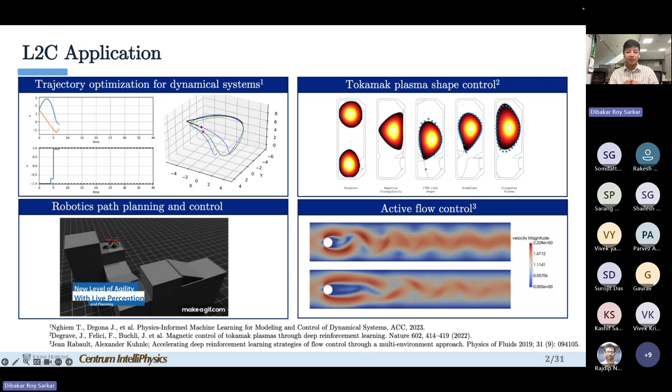These four examples, spanning from ODE to PDE, from RL to DPC to imitation learning, all share a common idea that I mentioned at the start: an offline-trained neural network replacing an online optimizer or a hand-tuned controller. Our paper sits squarely in this family. On the next slide, I will step back and give you a broader view of how the control field is organized today.

So we have seen what learning-based controllers can do. Let me zoom out and give you the honest picture of where the control field sits today, so we can see where our contribution lands. In general, we can categorize the optimal control problem into model-based or model-free methods, and model predictive control is a flagship method of model-based optimal control.

If you walk into any industrial facility, a chemical plant, a building HVAC system, a refinery, a vehicle control system, you will find something that Richard Murray at Caltech has pointed out in his optimal control textbook. About 95% of the control loops running right now are PID controllers or hand-tuned, expert-driven, rule-based logic. That is the reality of the field. The remaining 5%, the more sophisticated setting, is model predictive control.

MPC is the workhorse of modern advanced control. It's rigorous, it handles constraints. It has been deployed on everything from autonomous humanoids to chemical plants to autonomous drones to autonomous racing, as you can see in the image here. When control people specifically say state of the art, they usually mean MPC.

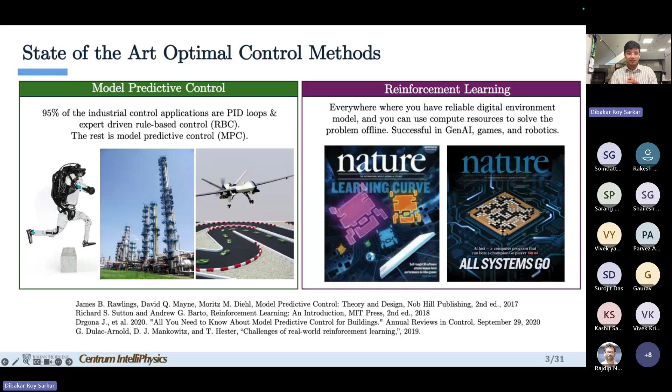Let's make the problem mathematically precise. So, what is an optimal control problem? Optimal control is, at its core, a very clean mathematical framework. It says, given a system we want to steer and a goal I want to achieve, find the control input that best matches the goal while preserving the laws of physics and any practical limits that we have. And that's the one-sentence definition of optimal control.

So let me walk you through the four pieces of the standard formulation, because every method in the rest of the talk, DPC, MPC, our framework, is just a variation of this template. So first we have some objective function we want to minimize, with two parts. It has some running cost integrated over the time horizon that penalizes what we care about at the time instances, like tracking error or control effort, and a terminal cost, phi of x at the final time, which penalizes how far the final state is from where we end up.

And the goal is to find the optimal control signal, u(t), that minimizes this total cost, subject to the state dynamics represented by this, with some initial condition. And that says that our control has to be consistent with the physics. Whatever you do with the control, the system should evolve through the physics, or through the system's actual dynamics.

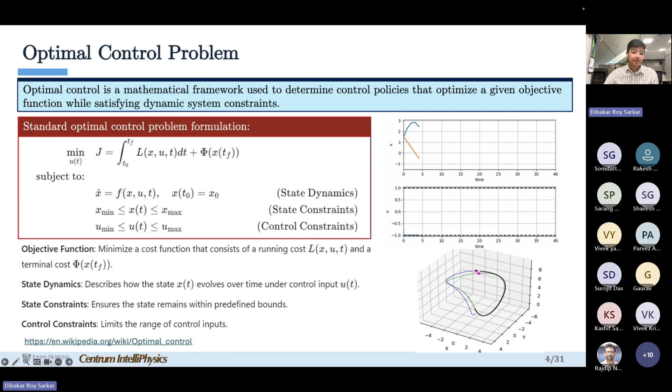And in the bottom is the same trajectory in 3D space, and the solver has found a path from the starting point to the target that's optimal in the sense of cost and feasible in the sense of constraints. And this is the formal problem.

So now, how do people actually solve this optimal control problem in practice? There are broadly three families of approaches, and every method in this talk is going to sit in one of these three columns. On the left are analytical methods. These are the classical tools from optimal control theory going back to the 1950s and 60s, like Pontryagin's maximum principle, which gives you necessary conditions for optimality and reduces the problem to a boundary value problem, and Bellman's principle of optimality, which is the foundation of dynamic programming.

It says that the optimal solution from any state is the best immediate action plus the optimal cost-to-go from the next state. These methods are mathematically beautiful for simple systems. They give you exact, closed-form solutions. But, and this is a big but, they scale badly. Dynamic programming suffers from the curse of dimensionality, and PMP gives you coupled differential equations that are often intractable to solve. So for real engineering systems with high-dimensional state spaces, analytical solutions are rarely the tool that we actually use.

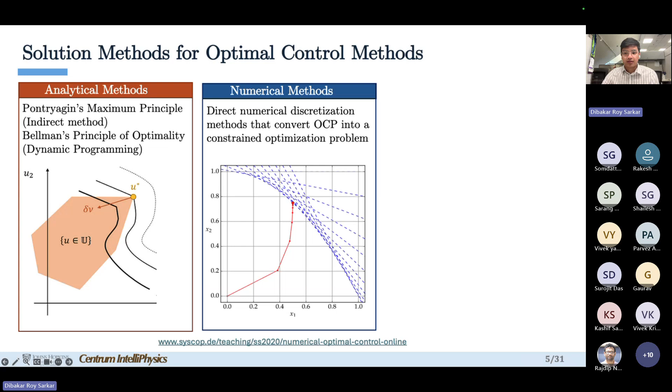In the middle, numerical methods. These are the workhorse of modern control. The idea is simple. Discretize the continuous-time optimal control problem in both time and state, convert it into a finite-dimensional constrained optimization problem, and hand it to the optimization solver. This is the engine that drives model predictive control. The plot shows a classic example of a numerical optimizer tracing an optimal trajectory through the state space, finding the best path subject to the constraints.

This is what commercial MPC solvers like CasADi and Gurobi are doing under the hood. Mature, reliable, and well understood. One limitation is computation cost. Solving the optimization problem at every time step can be expensive, especially for nonlinear systems.

On the right-hand side is the newest branch, the data-driven methods: approximate dynamic programming and, more prominently, reinforcement learning. Instead of solving the optimization analytically or numerically every time, you train a neural network agent to output good actions directly based on experience. In the classic RL loop, the agent takes some action, the environment returns some state and a reward, and the agent updates its policy. After enough iterations, the agent has learned a policy that acts well without solving any optimization online.

Now, here's the important thing to notice. Our paper is going to sit in the third column. It's a data-driven method, but with an important twist.

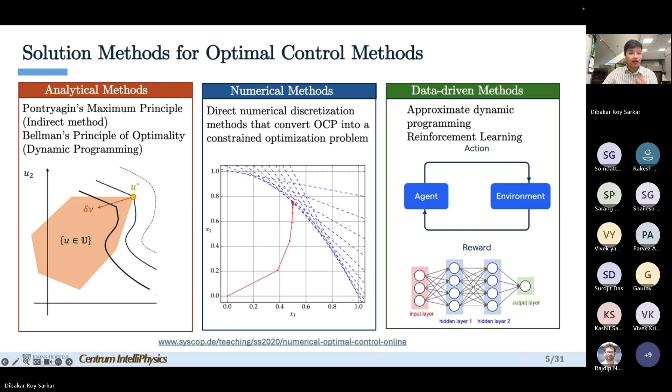First, let me show you how MPC, the numerical method workhorse, actually works in practice, because DPC is best understood as a direct response to what MPC does. Let me walk you through model predictive control in detail, because our work is just adding to this method. And understanding exactly what MPC does makes it obvious why we need something different for PDE control.

In one line description, MPC has three key pieces. I want you to hold on to these three pieces. MPC computes the optimal control inputs at each time step by solving a finite horizon optimal control problem in real time via online optimization. Each of these phrases is doing work, but the last one, real time via online optimization, is where the trouble starts in the PDE system.

And here is the mathematical problem MPC solves at each time. It's the same optimal control formulation we just saw on the previous slide, minimizing some sum of stage cost plus some terminal cost, subject to the dynamics, some state constraints, some input constraints. And the only difference from the standard formulation is that the horizon is finite. So we have N steps into the future, not infinite. And that's what makes it computationally tractable.

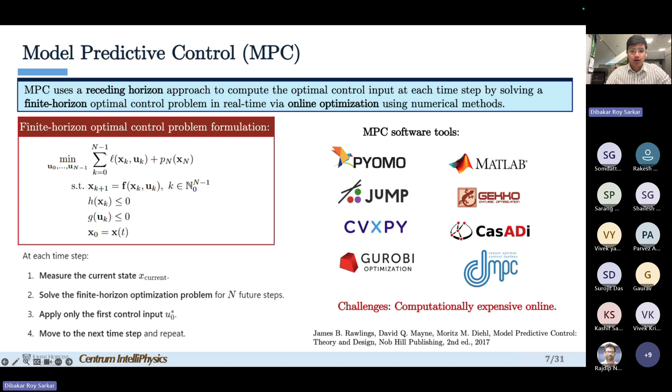So the same slide, but I would like to call out a few things that weren't on the previous slide. First, MPC is not a niche academic method. Look at the tools right now: Pyomo, CasADi, Gurobi, CVXPY. All these are mature, widely used, production-grade software packages. Every one of them is actively maintained, well documented, and used in real engineering practice. If you want to do MPC today, the software ecosystem is rich and ready.

So in our experiments later in the talk, we benchmark against nonlinear MPC. We use CasADi with the IPOPT solver, which is an interior-point method, one of the most respected open source stacks in the space. Second, the challenge called out in red at the bottom: computationally expensive online. This is the issue I was talking about, that you have to do this nonlinear optimization every single step.

And for a small ODE, for short horizon, modern solvers handle it comfortably. But when the system grows, high state dimension, longer horizon, nonlinear dynamics, the per step cost grows rapidly. For PDE control specifically, where the state is a discretized field of 1,000s or 100s of variables, MPC per step time can reach seconds, and this is prohibitive in real-time deployment. So MPC is the gold standard, but its computational cost is a real barrier for high dimensional real-time applications.

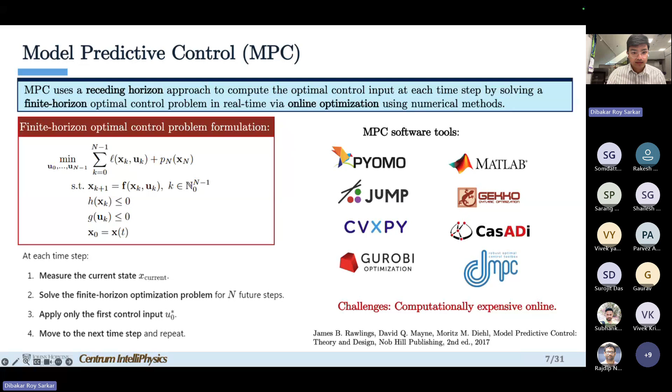Why? In the next section, I will give you an idea about why exactly it is so expensive if we increase it. So I want to show the easiest possible version of it, and then ask what happens when you start scaling up, because the scaling argument is what motivates everything in the rest of the talk. So this is a linear MPC. It's a special case where everything is nice. The system dynamics is linear and the cost is quadratic, state and control squared with some positive definite weight matrices, and the constraints are linear.

As you can see, under this assumption, the MPC optimization is no longer a general nonlinear program. It collapses into a simple object, a quadratic program, or a QP, where you have one matrix H, one linear term, a set of linear inequalities, and this is the best case scenario for MPC. And I'm showing you this because I want you to think about what easy actually means here in terms of compute.

QPs are a very well-studied problem. For a small system, say a handful of state variables, a dozen control inputs, a predictive horizon of maybe 20 steps, modern QP solvers handle this in microseconds, truly fast. This is why linear MPC is deployed on everything from drones to autonomous racing. You can solve at kilohertz rates on modest hardware.

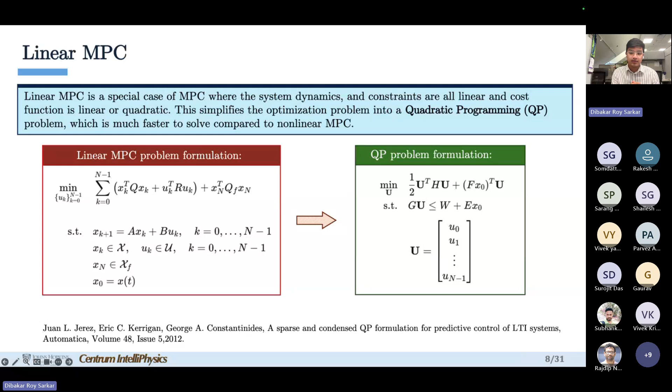So the computational reality is this. MPC is beautiful for small systems, workable for medium systems, and essentially impossible for the kind of PDE systems we care about in real-time settings. And this gap is what we are trying to fill. And the answer is not just to solve the optimization faster, it's to move away entirely to the offline setting, which brings us back to the learning to control framework.

So what happens in learning to control? Let me make it mathematically precise. Here's the setup: we start with the same parametric optimal control problem we have been discussing, minimize the stage cost and a terminal cost subject to some dynamics, state constraints, control constraints, nothing new here. But notice there are two sources of variability highlighted at the bottom.

The initial state x0 is drawn from some distribution, a family of possible starting conditions, and xi, which we call the scenario parameters, is drawn from a distribution. It collects everything that could change from one instance to the next, for example, reference signals, disturbances, constraint bounds, physical parameters. This is just a simpler mathematical representation, xi. So we don't have one optimal control problem. We have a whole distribution of optimal control problems indexed by the initial condition and the scenario.

Now, here is the key object. If we had infinite compute, we could in principle solve this optimal control problem at every single possible initial condition and every possible scenario and get back the optimal action for each one. And that map from every possible instance to the optimal control is what we call the control solution operator, denoted as pi star. It takes the current state and the scenario parameter and gives you back the optimal control decision. We want to approximate this pi star with a parameterized policy, a neural network called pi theta, and theta are the learnable weights.

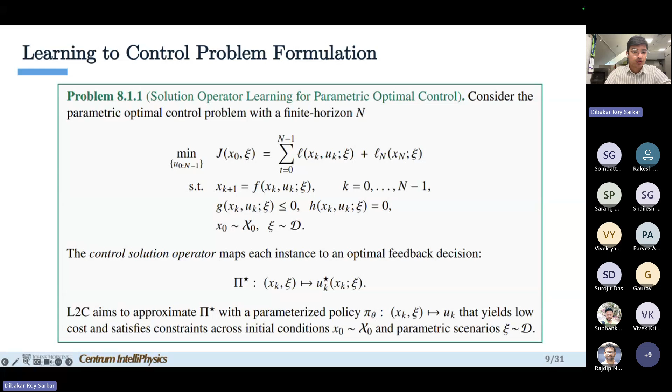So the natural question is, what should that network, or the policy network that we have been talking about, look like? There are a few standard choices in the literature, and they fall in these three broad categories. First, the direct state feedback is the simplest and the most common practice. The pi theta is just a feed-forward neural network, MLP, or any structured architecture that takes in the current state and scenario and spits out the control action. No solver, no optimization, no iterative procedure, one forward pass. This is what we use in our paper, and this is what most people mean when they say learned controller.

And the advantage is speed. The deployment is just a matrix multiply, and the disadvantage is that you lose an explicit notion of the optimization at inference time, which means certain things like hard constraint satisfaction have to be engineered in some other way.

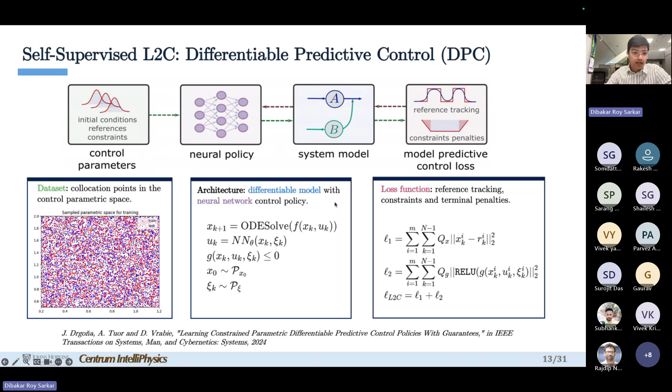And what we do is try to minimize this loss using some simple gradient descent or stochastic gradient descent algorithm, and train the policy. And the next two slides are just formal definitions. I will not go into details.

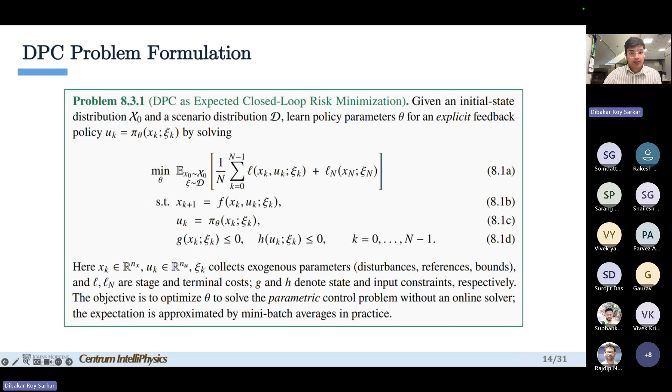So basically, your problem has become an expectation over an expectation. And that's where we are trying to learn over a whole distribution of initial conditions and a whole distribution of the parameter space. And there are specific ways to actually make these constraints differentiable, which I will not go into the details of at the moment.

But if you look at the loss terms also, the loss terms are simple. You can see this is the sum over all the possible samples, and this is the sum over all the time horizon. You're evaluating some kind of trajectory loss. Then you have some constraints, and you have the terminal loss, and you evaluate like this. And this is the formal definition of the data set that we were talking about, which are just instances of parameters and the disturbances or initial conditions.

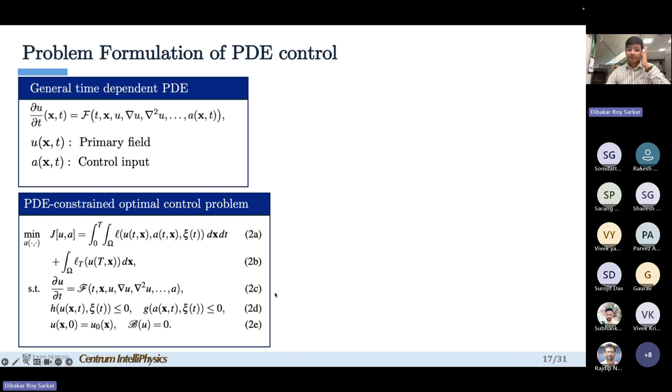And the control problem we want to solve is the same old story: minimize a cost function subject to some dynamics and state constraints. The only thing that is different from the ODE system here is that the state is an entire spatial field, not a finite vector, and the cost integrates over space and time. And the constraints hold pointwise, and the structure is the same problem. So just a state upgrade from R^n to an infinite dimensional function space.

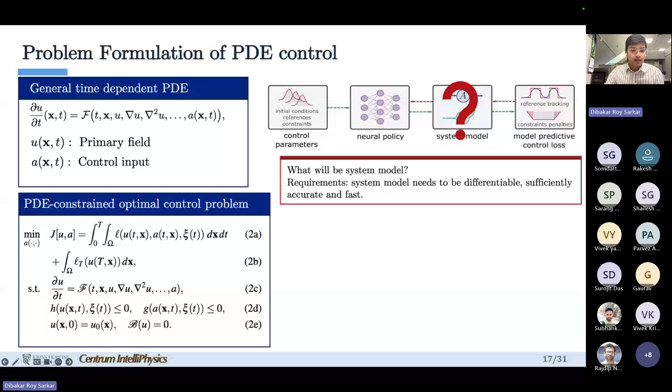It should be accurate, so the policy learns the control for the real physics and not a dream. And it has to be fast so that we can afford to simulate thousands of trajectories during training. The candidate answers are basically differentiable physics, which was, I think, proposed from this group, and now a lot of different groups are working on building this kind of differentiable solver.

And the second idea can be data-driven surrogates: learn dynamics from the simulated data or the data in hand, and we chose to go with the data-driven approach. In our case, the physics is not known, and we learn a surrogate model, which is a neural operator, from the simulated data.

And we choose the neural operator path, which raises a question: what is a neural operator, and why is it the right tool here? I will answer that in the next slide. And before that, I would like to give you one slight detail about the control.

The control, basically the source, is represented in some finite dimensional way. We parameterized it as a sum of Gaussian basis functions at fixed actuator locations, each with time varying amplitudes. These match a realistic physical setup where you have a small number of local actuators like heater jets and chemical injectors whose amplitude you modulate over time.

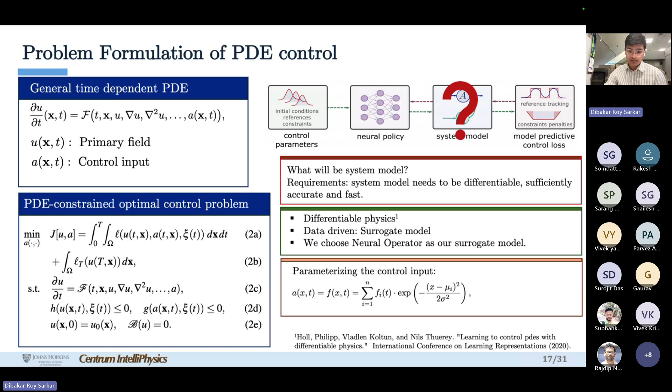So the policy output isn't a whole field a(x, t), it's just amplitudes of these Gaussian functions. With those pieces, let me zoom in on the surrogate model, and first we will ask a question: what exactly is a neural operator?

In the top row, this is what every machine learning person has seen 100 times. You feed a neural network a fixed size input, a photograph of a cat, it does its thing through some layers, and out the other side comes a label: cat. The input is finite dimensional, the output is finite dimensional. It's mapping between two Euclidean spaces, vector in, vector out.

That's the framework underneath 99% of what we call deep learning today. Image classification, regression, translation, everything. In the bottom row, in our world, PDEs, physics, scientific computing, the objects we care about are not vectors, they are functions. A temperature profile along a rod, a velocity field across a fluid, a population density over a landscape. These are infinite dimensional objects. They take a value at every point in the space.

So what happens when I want a neural network that takes the whole temperature field, a function over space, and gives back the profile 1 second later? That's not vector to vector, that's function to function. And classical neural networks don't naturally do it. So we need a generalization, a neural network whose input is a function and whose output is another function. And that's what a neural operator is.

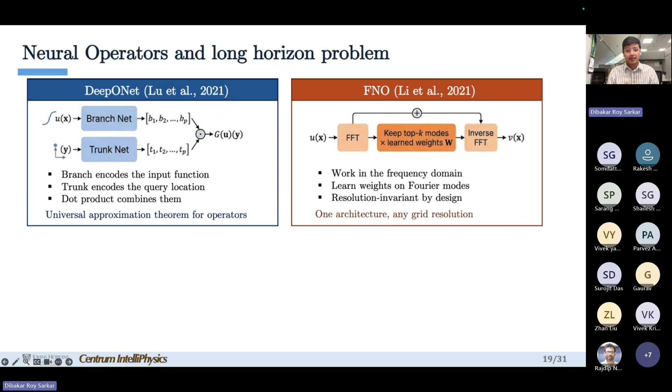And with these two powerful tools, you might be thinking, oh, okay, the problem is solved. Pick one and go. But here's the catch. This is the motivation for everything in our work. So both FNO and DeepONet typically train on a single step prediction. So input the state now and output the state at a later time. That works beautifully when you have one step.

But in a control application, what we actually care about, we want to simulate far into the future to plan your action. So what people do, they use this operator autoregressively, taking one step, feeding the output back into the next step, and doing this further. And when we do this, we have the problem of error accumulation through time.

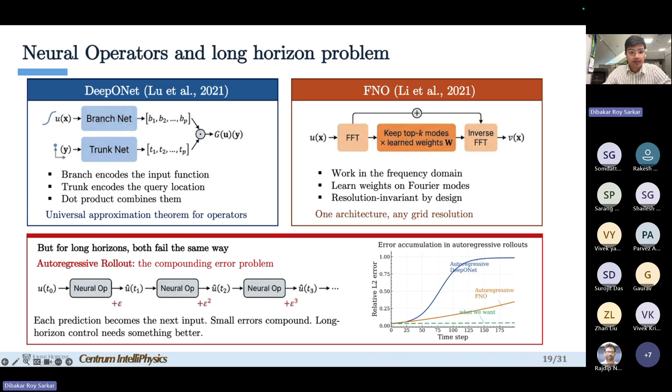I'm showing this in the plot. As you can see, DeepONet generally has this accumulation of error, and FNO often has slightly lesser accumulation of error. But this is not something that we want. We want a very bounded error over time. And that's why we use the time integrated neural operator, which was coined by my colleague Dibyajyoti Nayak.

So instead of predicting the next step directly, we predict the time derivative of the step and let the numerical integrator do the rest of the job for us. And to help you understand what the data looks like, we will have some kind of initial and final state, and we will have some random control signals. Since we have these two different types of inputs, we are taking two different branch networks, and we have a trunk network at the bottom.

What we do, we compose it using dot products, and then try to predict the derivative of the specific u, and then do an ODE solve. In our case, we used RK4 to get the next step. In this way, we train for next step predictions. And when we do autoregressive rollout, we found that it works really well.

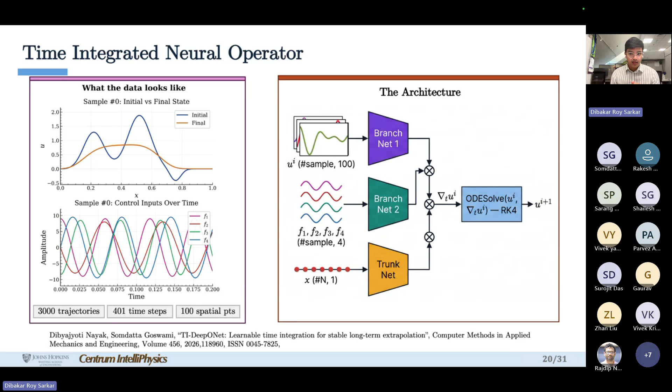Now, I think it's time for me to rush through the results because I don't have a lot of time. But the general idea is this. We have this differentiable predictive control framework. We train our time integrated DeepONet prior, and then we freeze this network in the next step, where the system dynamics becomes the time integrated neural operator, and we train this offline.

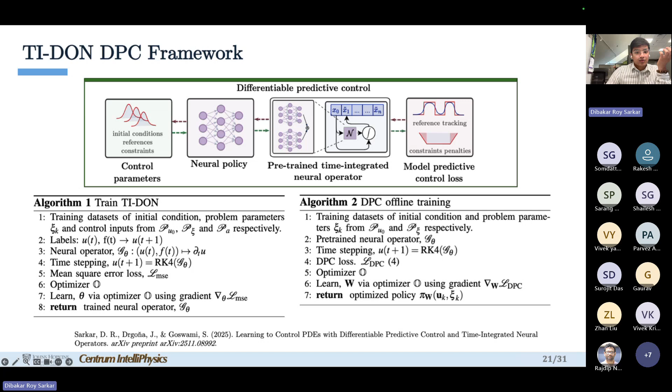And once we train this offline, we can actually feed it into the numerical solver to check whether a policy trained on this time integrated neural operator can be deployed in high fidelity simulations or not. So I will show you quickly some examples. This is a heat equation.

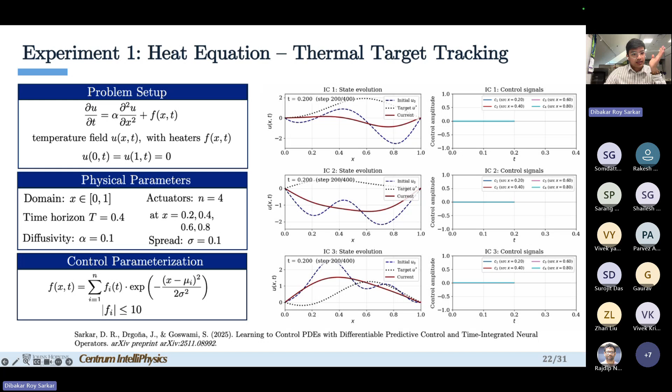So basically this is an initial condition, and if you evolve the system, it will be like this, the red line. But what do we want? We want to reach this target, the black dotted line, as you can see. So we want to learn some controller for that. The first step, exactly as I was explaining, we learned TI-DeepONet. And since heat is a very smooth field, we were able to learn it very nicely. We have a mean absolute error over 3,000 holdout samples of only 1%.

Using this, we train our surrogate, and we plug our policy into the actual numerical simulation. You can see the results here. Once you plug in the policy, it gives us some control signals, and it makes sure that the state dynamics reaches the target, as you can see. And you can see the learned dynamics of this control.

So in the initial stage, it gives a lot of control, and then when it's reached, it just stabilizes. That's why you have a lot going on before a certain point, and then it's stable because it holds the temperature at that specific location. And when we compare it with numerical MPC, we have almost similar accuracy, and orders of magnitude speed up, because we are comparing an optimization to one forward pass. So yeah, that was evident.

There are other problems like the Burgers shock problem. What was our goal? In Burgers' equation, this is an inviscid Burgers' equation. For any initial condition, you will have this tendency of forming a shock. And this curvature is basically the metric that we were looking at. We want a smooth field throughout. So you can see that this curvature is exploding after a certain time, right?

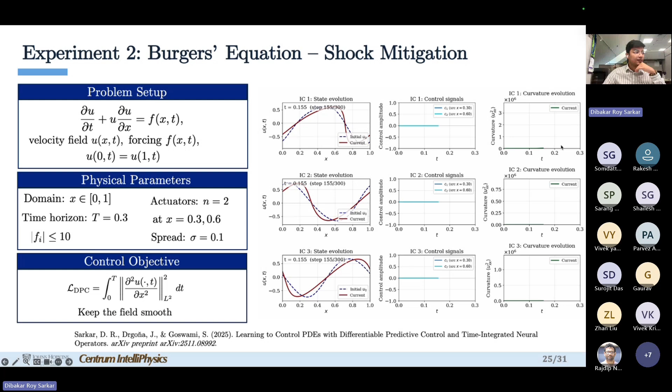And we want to control that. And what we did, we trained the TI-DeepONet, and then learned the policy on this TI-DeepONet. And this had like a 10% error, but at the same time, it was actually guessing correctly where the shock will form. So the shock was not perfect, but the physics was right.

And that's why when you use this controller in the physical simulation, you can see that it is still able to dissipate the shock. And you should look at these curvature plots to understand better. You can see that in all the three different initial conditions, it's dissipating out. So the accuracy in this case is a little bit lesser than the nonlinear MPC. It's one order lesser, but in computation time there will be a very high speed up in our case.

Moreover, I think the most interesting problem is a Fisher KPP reaction diffusion problem, where we want to reach a specific density given some initial density. And here, since we have a reaction, the reaction is continuously trying to make this density go to the equilibrium. So our controller needs to fight against this reaction to make sure that it reaches the specific distribution density that we care about. And same story, we build a TI-DeepONet, very good accuracy, under 1%, and then we deploy the trained policy. And you can see here that it almost matched the required density that we want.

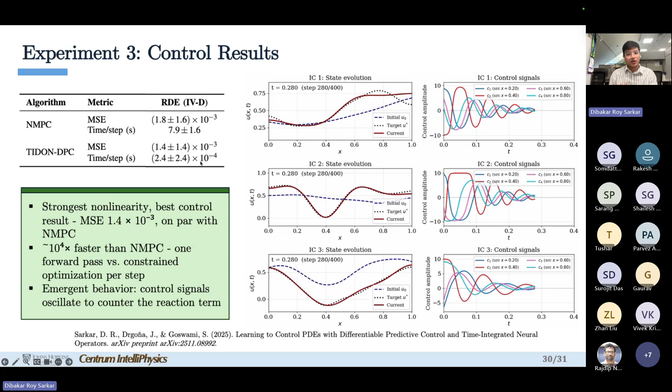So, in brief, we came a long way. Our method uses a pre-trained neural operator in the differentiable predictive control framework to solve a PDE control problem, and we showcase different canonical examples where our framework does equally good as nonlinear MPC with a high speed up.

And there are a lot of open questions, like how do we make sure that there are stability guarantees? Our group is working with Professor Jan on how to make sure that we have stability guarantees, and the scaling up of the same problems into 2D and 3D domains. That's what we did in one work. And there is also a problem of sim to real transfer, about how to handle different types of noise when you have partial observation, what exactly we can do.

And with that, I would like to thank you all for sticking with me through this talk, and I would be happy to answer some questions if you have.

Thank you, Dibakar sir, for this very nice talk. Actually, I really liked it. You explained a lot of optimization as well; long back I did an optimization course, so it was a nice refresher as well. Very nice work. So maybe I have a question.